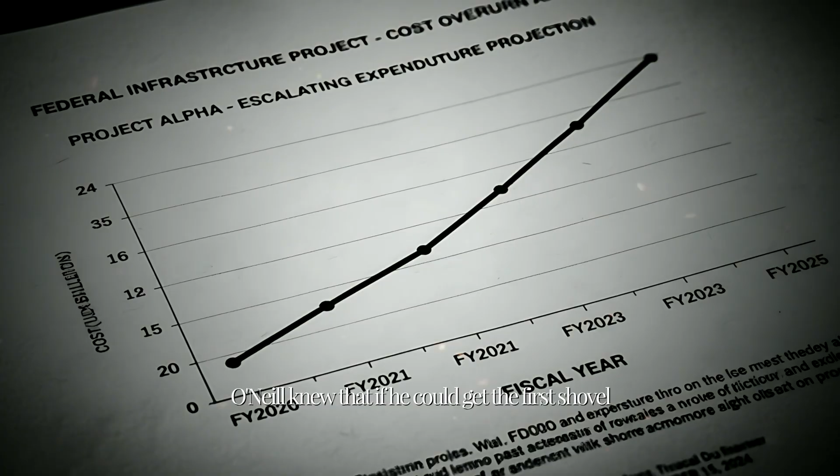But Reagan underestimated the political machinery of Massachusetts. Tip O'Neill, the legendary Speaker of the House and a son of North Cambridge, made it his life's mission to secure the funding. O'Neill knew that if he could get the first shovel in the ground, the project would become too big to fail. He whipped the House into a frenzy, and in a historic showdown, Congress overrode Reagan's veto by a single vote in the Senate. The floodgates were open. The federal government was now on the hook for 90% of the cost. The dream was alive, but it was built on a foundation of political warfare and financial deception.

Because here is the truth they didn't tell the public in 1987. That $2.8 billion price tag, it was a lie. Internal memos and early engineering assessments already suggested the real cost would be closer to $10 billion, and eventually it would balloon to over $24 billion. The architects of the project knew that if they told the truth about the cost, the public would never allow it to start.

So, they engaged in a systematic campaign of lowballing and creative accounting. They pitched a bargain and delivered a debt that would take generations to pay off. They focused on the miracle of the engineering, distracting the world with the sheer scale of the task. And the scale was truly terrifying.

Imagine trying to perform open-heart surgery on a patient while they are running a marathon. That was the Big Dig. The engineers had to tunnel under a city that was nearly 400 years old, filled with colonial-era foundations, ancient wooden pilings, and a spiderweb of utility lines that no one had bothered to map in a century. They had to move 15 Egyptian pyramids worth of earth, over 16 million cubic yards of dirt, all while keeping the city's commerce alive above them.

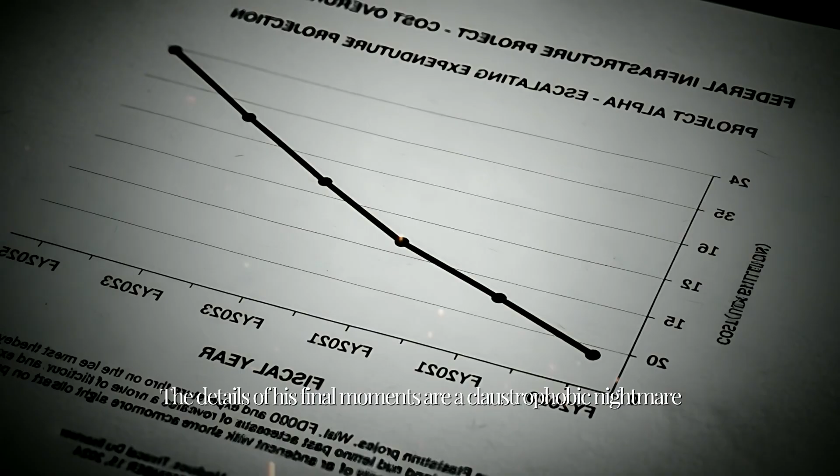But something went wrong. In the darkness and the silence of the harbor floor, Ray became trapped. The details of his final moments are a claustrophobic nightmare. He wasn't killed by a sudden explosion or a falling beam. He was claimed by the freezing darkness, unable to extricate himself as his oxygen supply became a ticking clock.

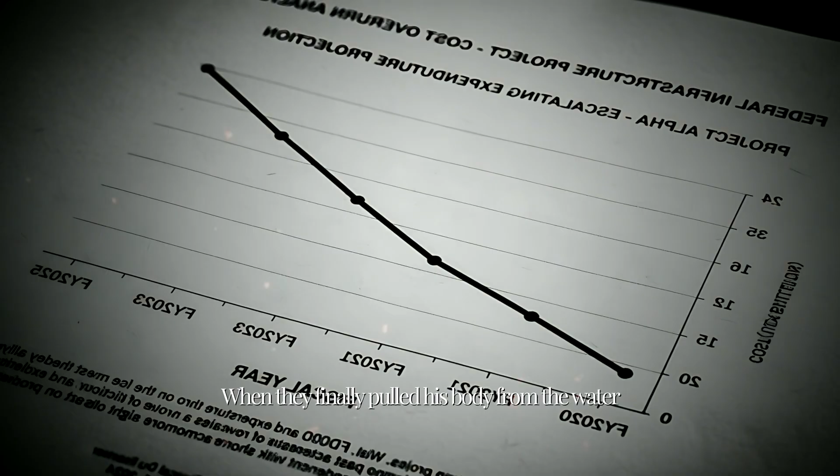When they finally pulled his body from the water, it was a stark reminder to every man on the project that the Big Dig didn't care about your experience or your skill. The harbor was a cold, indifferent master. Despite the tragedy, the project didn't skip a beat. The schedule was God, and the God was hungry.

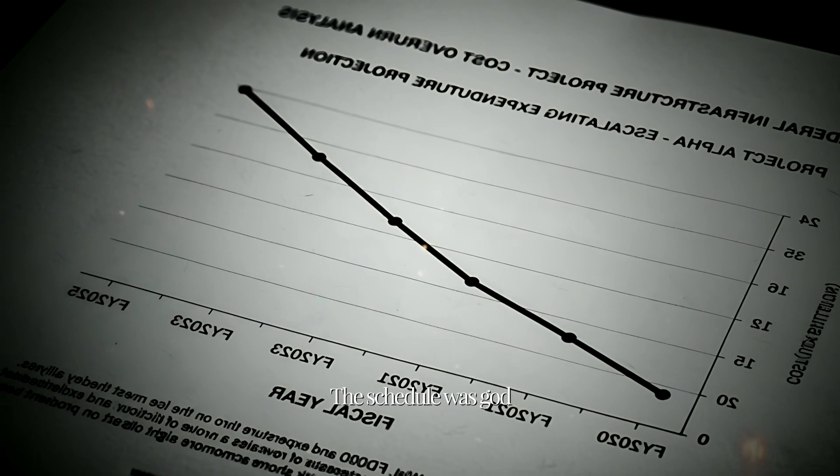By the late 90s, the Big Dig had entered its most frantic phase. This was the era of the golden handcuffs. To keep the unions from striking over the increasingly dangerous conditions, the contractors flooded the site with overtime. Laborers were pulling in 80, 90, or even 100 hours a week. It wasn't uncommon for a man to take home $3,000 a week in 1998 money,

but that money came at a steep price. The psychological toll was shattering families across New England. Fathers became ghosts. They would leave for the hole before their children woke up and return long after they were asleep, their skin stained gray by the slurry, their eyes bloodshot from the diesel fumes. This exhaustion led to what the local papers would later call the Summer of Blood. In 1998, the safety culture of the Big Dig collapsed under the weight of its own ambition.

On May 21st, the violence moved from the mud to the sky. Brian Heffernan was a 34-year-old ironworker. He was a man of the heights, part of the crew building the Leonard P. Zakim Bunker Hill Bridge. The Zakim was intended to be the crown jewel of the project, a stunning cable-stayed bridge that would become an icon of the Boston skyline. But on that spring morning, it was just a place of death.

Brian was working on one of the massive bridge towers, 40 feet above the decking. In the world of ironwork, 40 feet is a routine height, but the Big Dig was never routine. A momentary lapse, a slip of a foot, or perhaps just the sheer fatigue of the 100-hour work week took its toll. Brian Heffernan fell. There was no safety net to catch him, no redundancy to save him. He hit the concrete below with a force that ended his life instantly.

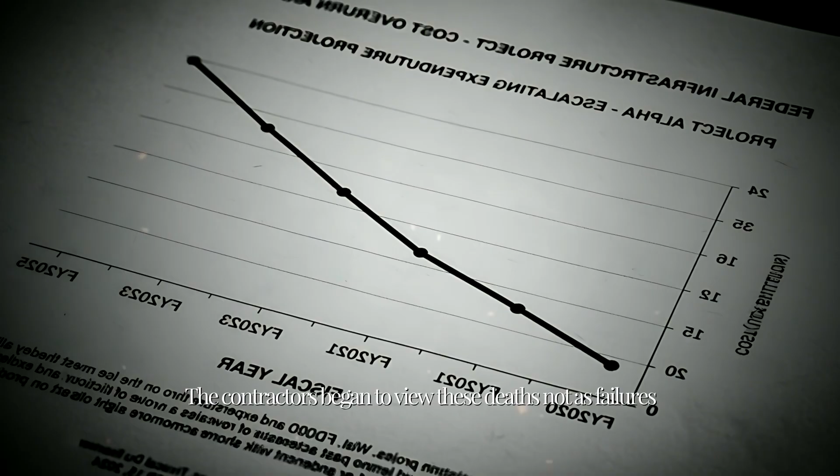The Summer of Blood should have been a turning point. It should have been the moment the federal government stepped in and demanded a halt to the project until safety protocols were overhauled. But the Big Dig was too big to fail. The political pressure from Washington and the Massachusetts State House was immense. Every day the project was delayed cost millions of dollars in interest and inflation. The contractors began to view these deaths not as failures, but as the unavoidable cost of progress. They used the high wages to pacify the unions, essentially buying the silence of the workers with hazard pay.

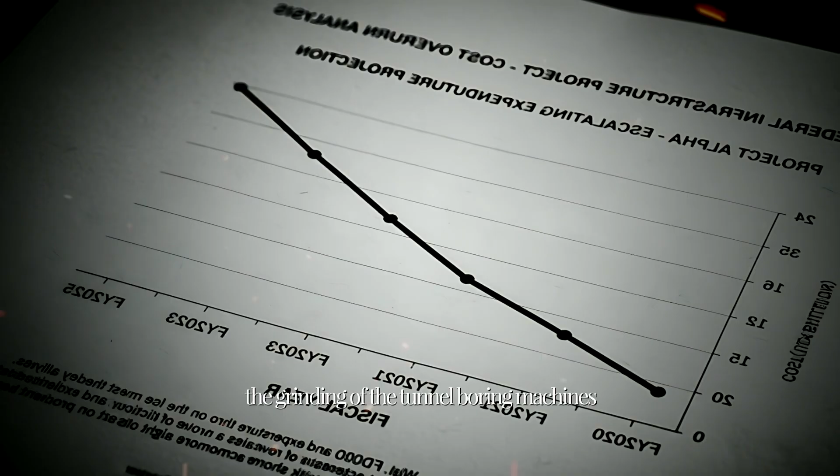You have to understand the atmosphere of the worksite. It was a war zone. The noise was constant, the grinding of the tunnel boring machines, the hiss of pneumatic drills, the shouting of foremen over the roar of the ventilation fans. The men were operating in a state of permanent fight or flight. When you are 100 feet underground and you hear the steel braces start to groan under the weight of the city, your instinct is to run. But you can't run. You have a job to do. You have a mortgage to pay, so you put your head down and you keep digging.

This environment created a unique kind of trauma. The Big Dig widow became a recognized phenomenon in the suburbs of Boston. These were women whose husbands were technically alive and providing well, but who had effectively lost them to the project. The divorce rates among the Big Dig crews skyrocketed. Substance abuse became a rampant, unspoken epidemic. Men would finish a 12-hour shift in the hole and head straight to the bars in Southie or the North End to drown the claustrophobia and the fear in a bottle of whiskey. They were building a world-class infrastructure project, but they were tearing their own lives apart to do it.

The culture of the project was also deeply segregated. While the unions were powerful, the most dangerous, backbreaking work often fell to the newest immigrants or those with the least seniority. There was a clear racial and social hierarchy in the anthill. The plum jobs operating the heavy cranes or the specialized machinery were guarded by the established families. The men at the bottom of the trench, the ones literally hand-shoveling the toxic muck and slurry, were often the most vulnerable. They were the ones who breathed the most fumes and took the most risks for the lowest relative pay.

By the end of the 1990s, the official death toll was rising, but the unofficial toll was much higher. How many men died of lung cancer 10 years later from the silica dust and diesel particulates they inhaled in those unventilated tunnels? How many died in car accidents driving home after a 20-hour shift? How many took their own lives because the pressure of the anthill became too much to bear? The records don't show those names. The records only show the industrial accidents, the drownings, the falls, the crushings.

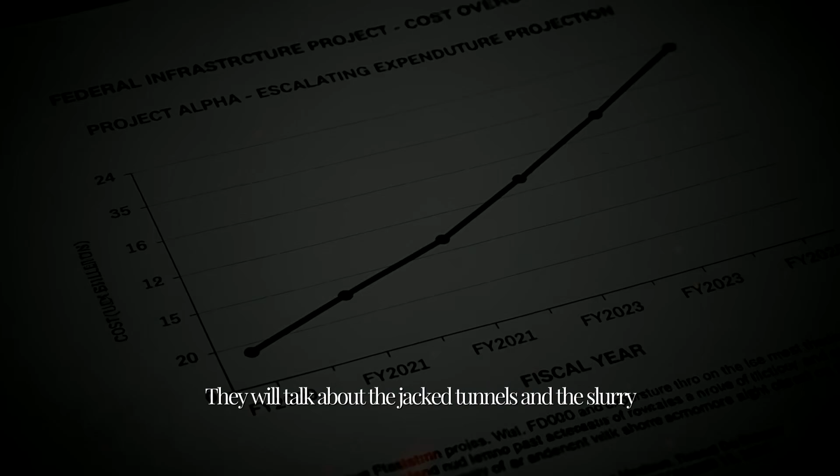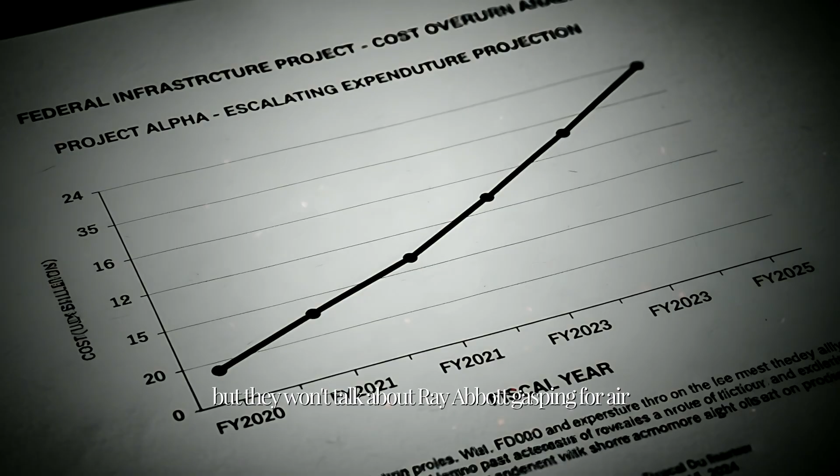The engineers will tell you about the technical marvels of the Big Dig. They will talk about the jacked tunnels and the slurry wall construction and the cable-stayed bridge. They will tell you how they moved an entire highway underground without shutting down the city above. And it is a marvel. But they won't talk about Ray Abbott gasping for air in the dark of the harbor. They won't talk about the sound Brian Heffernan made when he hit the deck of the Zakim. They won't talk about Pat Sarni being squeezed to death by a machine in a hole that smelled like rotting earth.

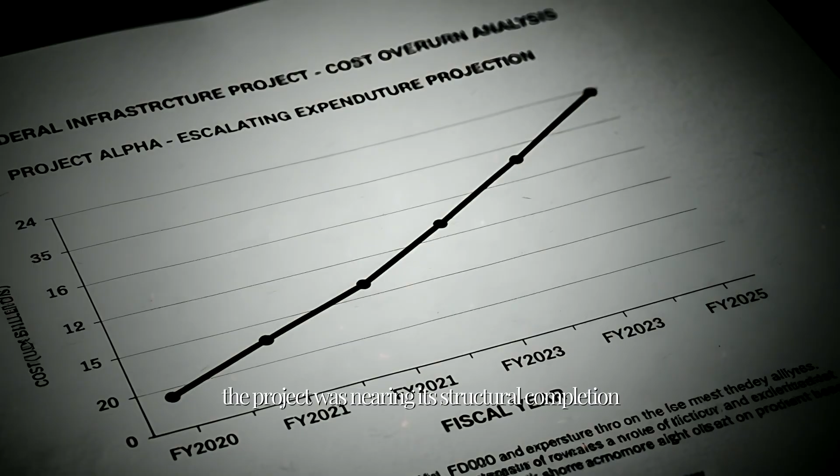As the millennium turned, the project was nearing its structural completion, but the human cost was becoming an open wound. The city was being transformed, the old elevated highway was coming down, and the greenway was beginning to take shape. But for the thousands of men who had spent a decade in the anthill, the scars were permanent. They had traded their youth, their health, and in some cases their lives for a set of tunnels.

The contractors continued to push. They were now facing massive fines for every day they were late. Safety inspections were often treated as a formality, a box to be checked on the way to a deadline. The warnings of the workers were ignored. When laborers pointed out leaks in the tunnel walls or cracks in the concrete supports, they were told to keep working.

The obsession with project completion had blinded the leadership to the reality of the structure they were building. They were building a tomb, and they were doing it on the backs of men who were too tired to protest. The tragedy in the D Street portal in 2006, where Milena Del Valle was crushed by 3 tons of concrete, was not an isolated incident. It was the logical conclusion of a decade of cutting corners, ignoring fatigue, and prioritizing speed over human life.

The Summer of Blood in 1998 had been the warning shot. The deaths of Abbott, Heffernan, and Sarni were the red flags that the system was broken. But the money was too big. The politics were too loud.

Next time you drive through the O'Neill Tunnel or cross the Zakim Bridge, look at the walls. Think about the depth of the earth around you. Think about the fact that you are traveling through a space that was carved out of the mud by men who didn't see their families for weeks at a time. The Big Dig is a testament to human ingenuity, yes, but it is also a monument to human arrogance. It is a place where the lives of the workers were treated as just another line item in a multi-billion-dollar budget. The death toll kept climbing, but the project didn't slow.

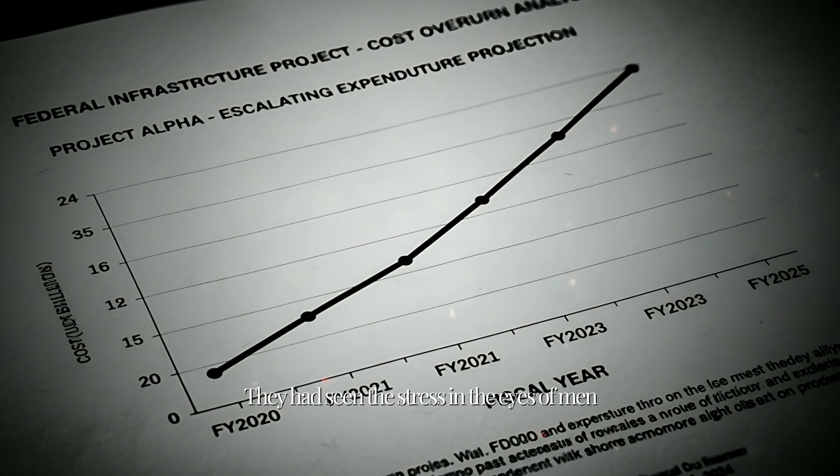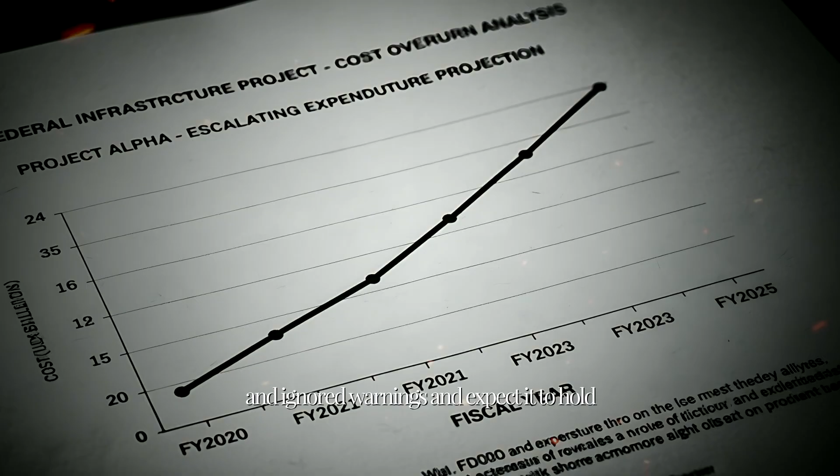The workers had seen the voids. They had seen the saltwater stalactites forming on the ceilings. They had seen the stress in the eyes of men like Jack Bennett. They knew that the completion of the project was an illusion. You cannot build a structure this complex with watered-down concrete and ignored warnings and expect it to hold. The ocean is patient. The weight of a city is relentless.

The Big Dig was marketed as a way to knit the city back together, to remove the green monster of the old elevated highway and replace it with beautiful parks and efficient tunnels. But as the first cars began to drive through those subterranean passages, they were entering a space that had been compromised by 1,000 small acts of negligence and a dozen major acts of corruption. The engineering challenges had been solved not through superior design, but through sheer force of will and a willingness to gamble with the lives of the public.

The true cost of these gambles was about to be paid in the most horrific way imaginable. The near disasters of the construction phase were just a rehearsal for the tragedy that would soon strike the innocent people simply trying to drive home. As completion neared, the true cost was becoming clear.

The silence in the boardrooms of Bechtel and Parsons Brinckerhoff was not a silence of ignorance, but a silence of calculation. While the public was told that the delays and the staggering price hikes were simply the cost of doing the impossible, a much more sinister reality was being filed away in cabinets and encrypted in internal memos. The true cost of the Big Dig was being hidden behind a wall of corporate protectionism and political vanity. By the late 1990s, the project was no longer just a construction site. It was a crime scene in the making.

The most damning piece of evidence was the epoxy secret. In 1999, 7 years before a single ceiling slab would fall, testing reports landed on the desks of the project managers. These reports were clear. The bolts intended to hold up the massive concrete ceiling panels in the Ted Williams tunnel were slipping. It was called creep, a slow, agonizing failure of the chemical bond between the steel and the concrete. The technicians who performed the tests saw the bolts moving under the weight they were designed to carry.